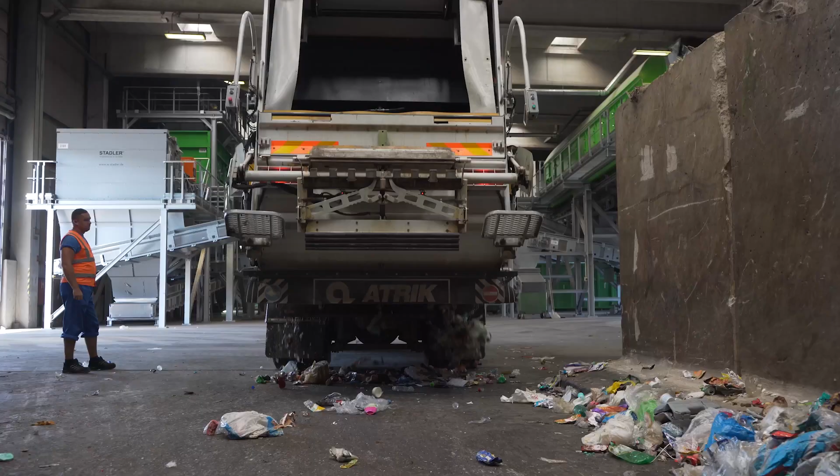In Slovenia, we have a well-developed infrastructure for collecting municipal waste. Waste treatment centers are home to many different processes, including sorting, recycling, and appropriate treatment of waste before it is used for energy recovery.

Celje District Heating Plant is the first facility of its kind for efficient waste processing in Slovenia. It is located in the northeastern part of the city of Celje, in the industrial zone. It is built in accordance with the highest environmental standards, which enables safe operation.

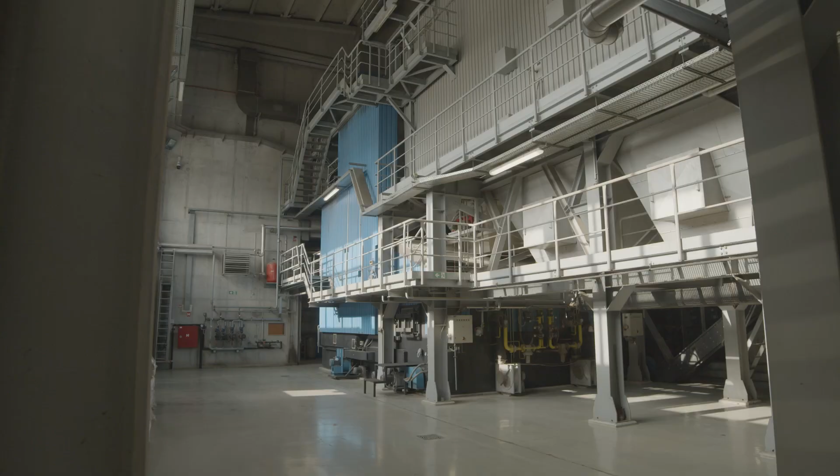The project received support from the city municipality of Celje, the EU Cohesion Fund and the Republic of Slovenia. The district heating plant is managed by the public company Energetika Celje. Celje District Heating Plant is an IED device, which means that it meets high environmental standards and operates in accordance with European Union guidelines for industrial emissions.

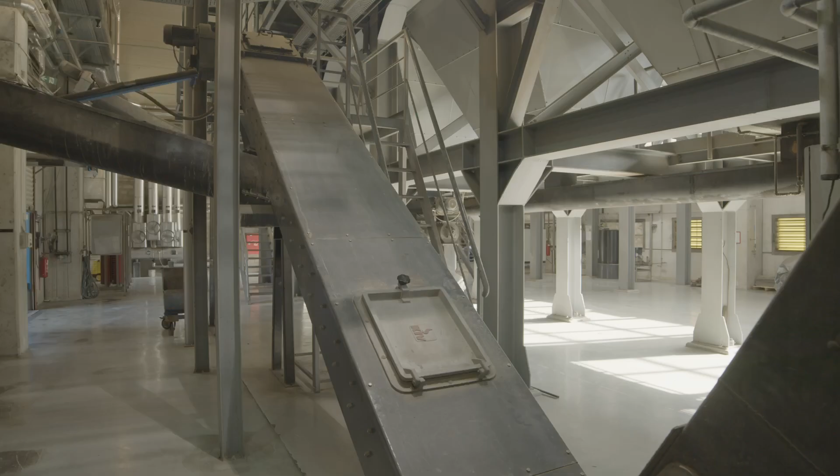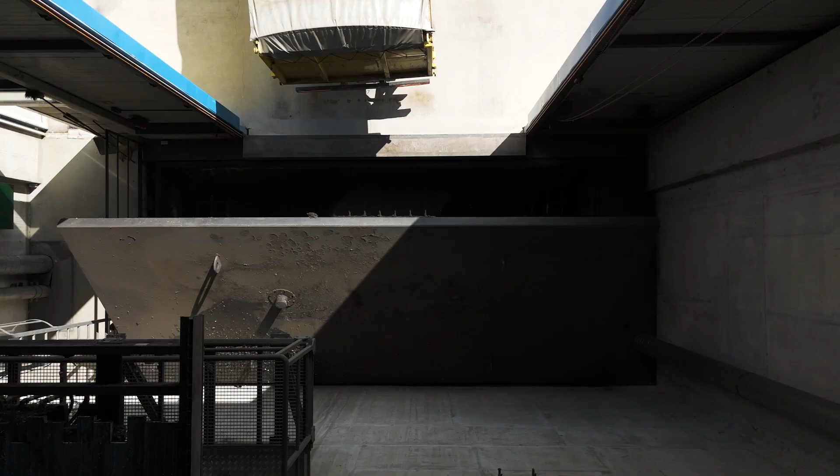With its operation, it follows all legally prescribed requirements and persistently pursues the goals of the latest available technologies. The Celje District Heating Plant is equipped with modern infrastructure for thermal processing of municipal waste and sludge from wastewater treatment plants.

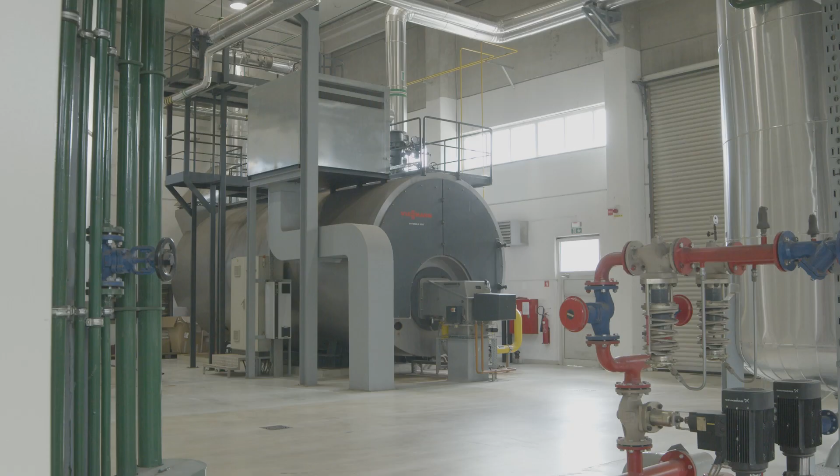Pre-treated mixed municipal waste, referred to as the light fraction, along with dehydrated sludge, is delivered to a storage tank. From there, the waste goes to the incinerator. High temperatures are generated and these waste materials are then utilized for energy purposes. Pre-treated waste, in the form of light fractions and dehydrated sludge from the wastewater treatment plant, is delivered by vehicles to dedicated storage tanks. Each of the two wastes has its own storage tank.

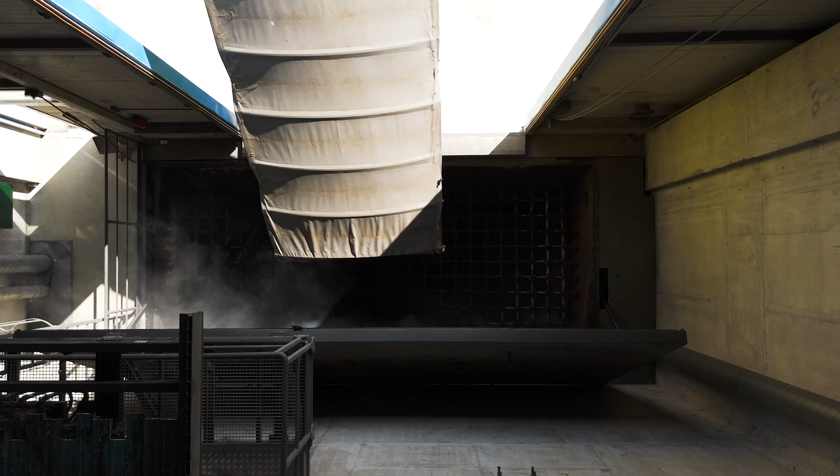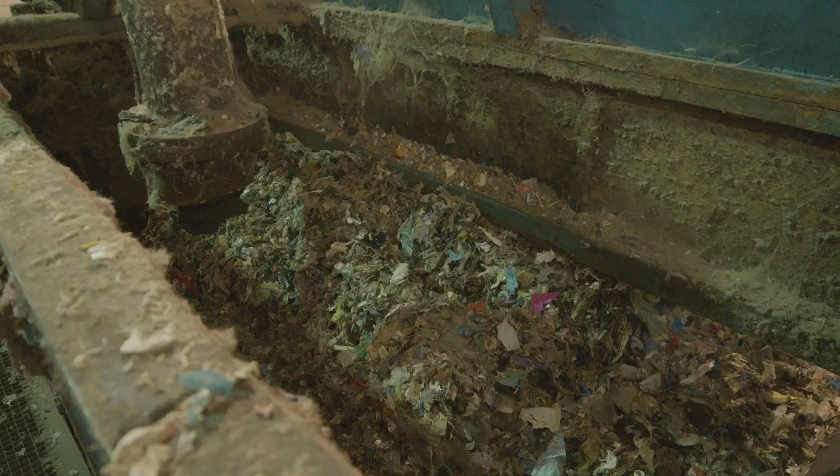The next step is to transfer them from the storage to further processing. This is followed by the dosing of the light fraction and sludge in the appropriate ratio to prepare the optimal fuel for thermal treatment. The solid fuel prepared in this way is continuously fed into the combustion chamber of the device in a closed transport system.

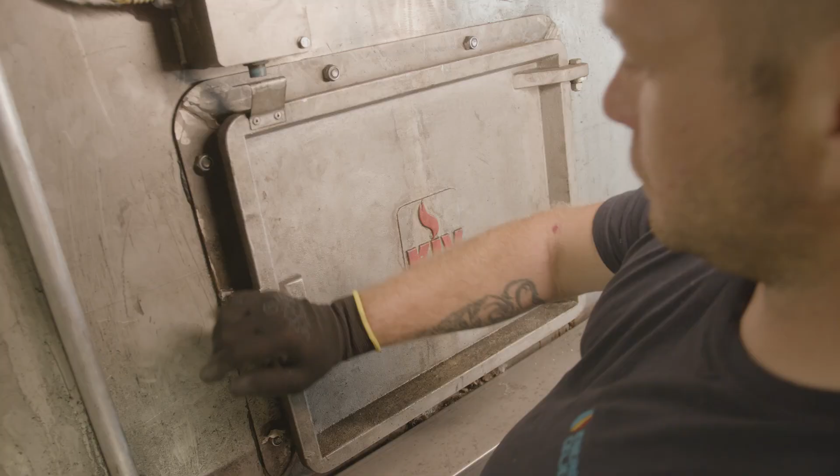On the grate, the solid fuel is first heated and dried, followed by gasification of the solid fuel on the grate. The resulting flue gases from the solid fuel gasification process are mixed with additional air. This is followed by combustion of the flue gases in the combustion chamber at a suitably high temperature above 850 degrees Celsius and a minimum residence time of 2 seconds.

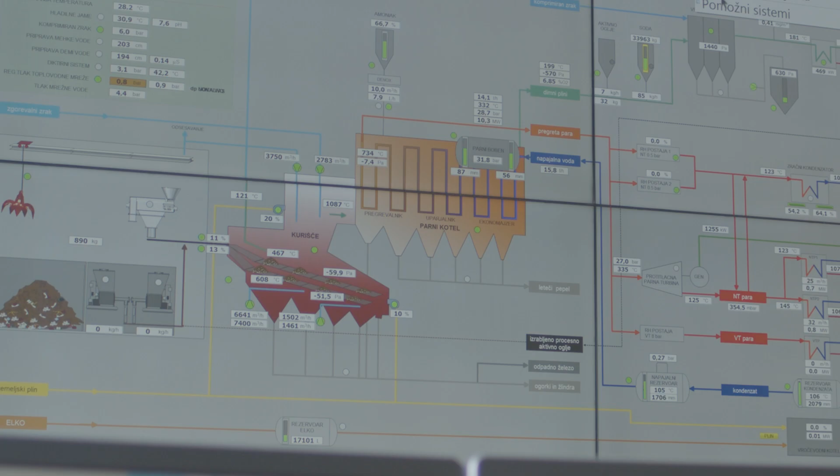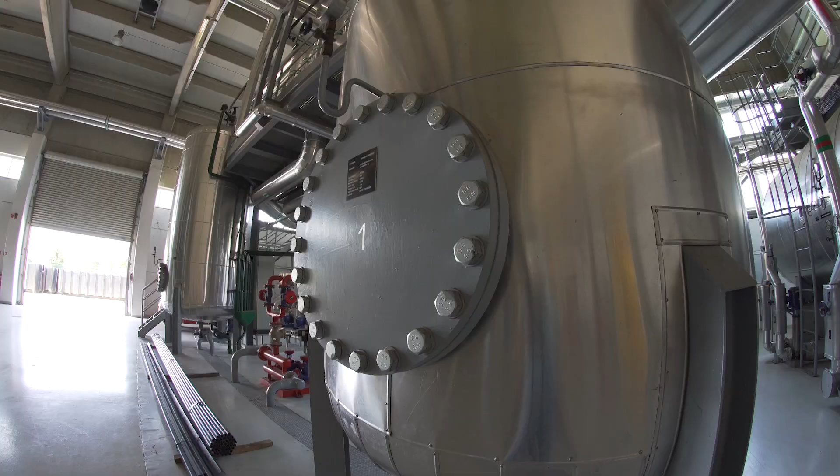The temperature in the combustion chamber is continuously measured and is included in the control loop of the process, which allows maintaining optimal combustion conditions. The generated waste flue gases are led through a steam boiler, where they give off their thermal energy. The waste flue gases are cooled down, and the released heat energy is used to produce superheated steam, which is used to produce electricity and heat for district heating.

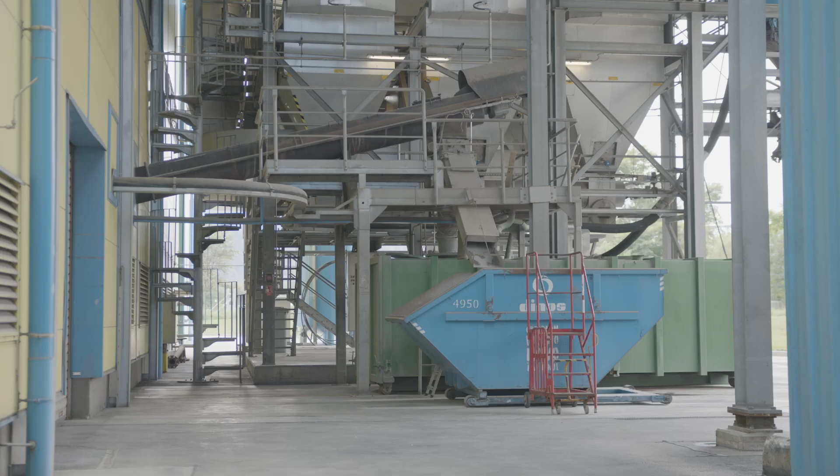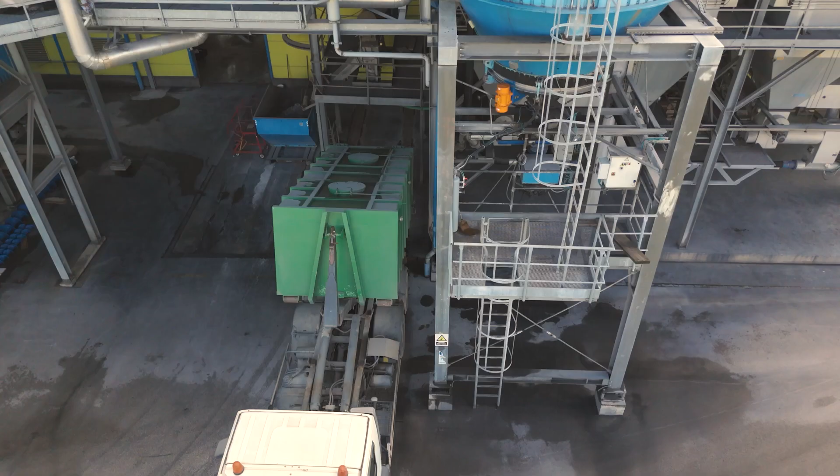During the process of thermal treatment of solid fuel, cinders and slag are produced, which are led to a dedicated container along a closed transport route and then disposed of as non-hazardous waste at a landfill. During the de-ashing process, ferromagnetic metals are also removed, which are given to the recipient of secondary raw materials.

The thermal energy obtained from the incineration of waste is used for the production of electricity on a steam turbine with a generator and for the production of heat for the needs of the district heating of the city of Celje. Combustible waste has a high calorific value and therefore represents a valuable local source of energy. By using the energy present in this waste, we can reduce our energy import dependence and consumption of fossil fuels, and at the same time reduce the amount of waste that ends up in landfills.

The technical capacity of the device is up to 40,000 tons of waste per year, which is also the amount of thermal treatment of waste according to the Environmental Protection Permit. The actual production, of course, depends on the amount and calorific value of thermally treated waste.

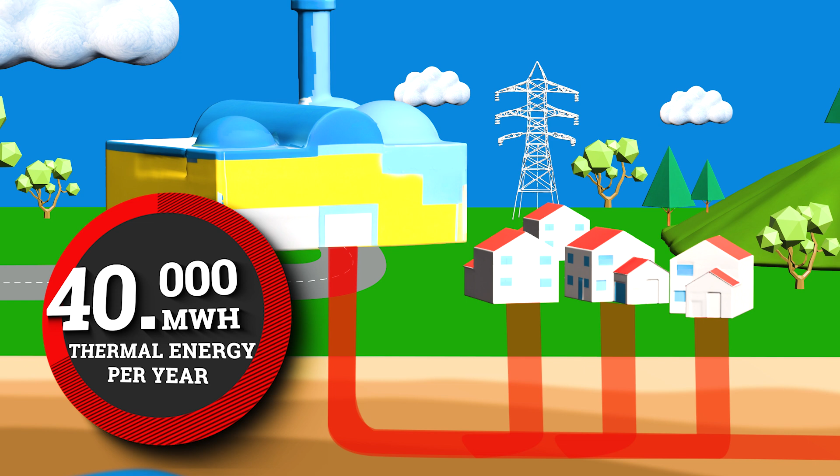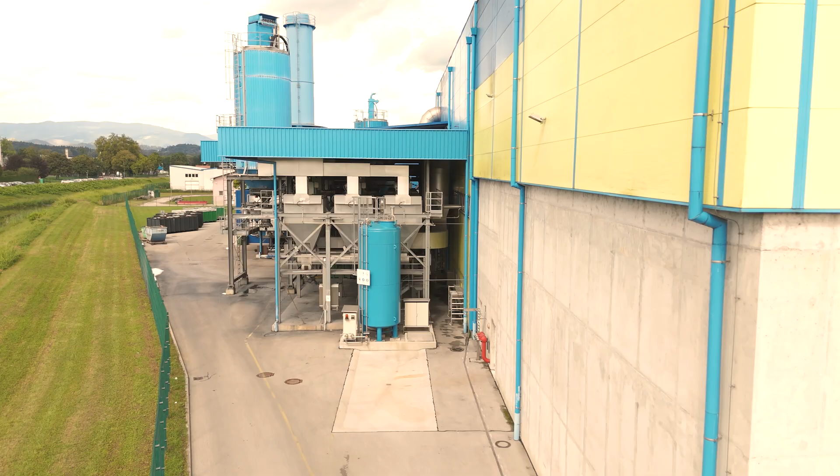Thus, on average, more than 40,000 megawatt-hours of heat energy and over 8,000 megawatt-hours of electricity are supplied per year. Next comes a critical step: the cleaning of flue gases. The facility utilizes advanced technologies for monitoring and reducing dust emissions in flue gases.

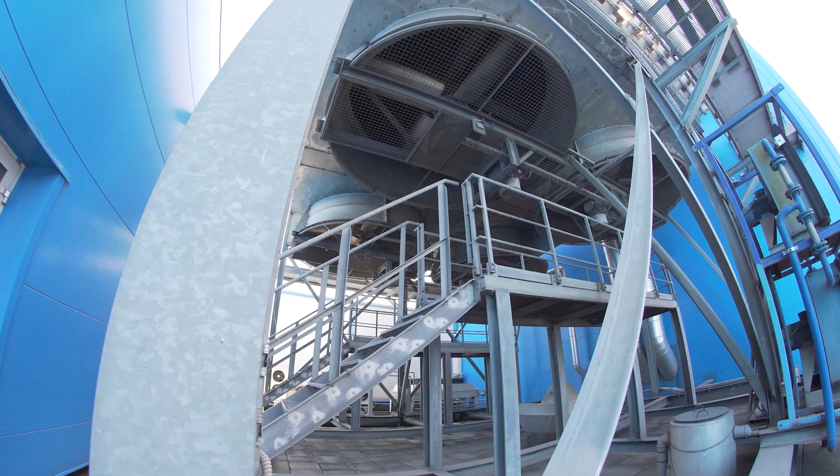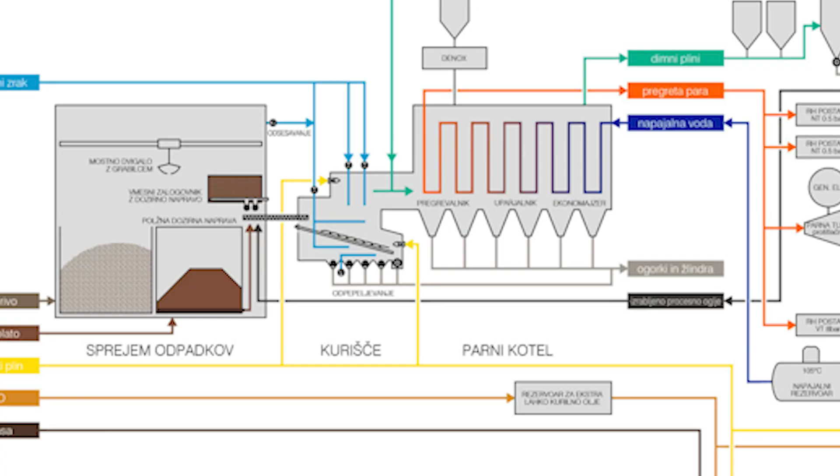The process of cleaning flue gases includes flue gas recirculation, the injection of ammonia water, sodium bicarbonate, and powdered activated carbon, as well as the use of bag filters and coke filters. Reducing emissions of acid gases, organic substances and heavy metals, and reducing dust emissions by blowing a mixture of sodium bicarbonate and powdered activated carbon into the flue gas stream before the bag filter, where the main chemical and physical

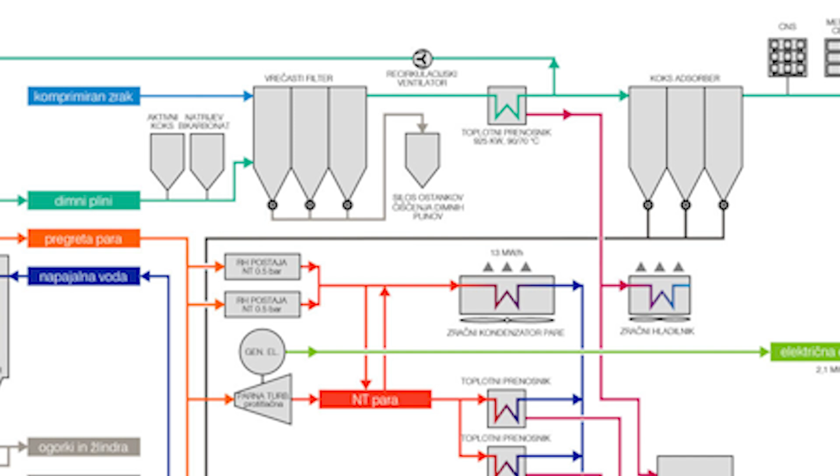cleaning processes take place. This creates solid cleaning residues, which are collected in a hazardous waste silo and handed over to an authorized receiver for permanent disposal abroad.

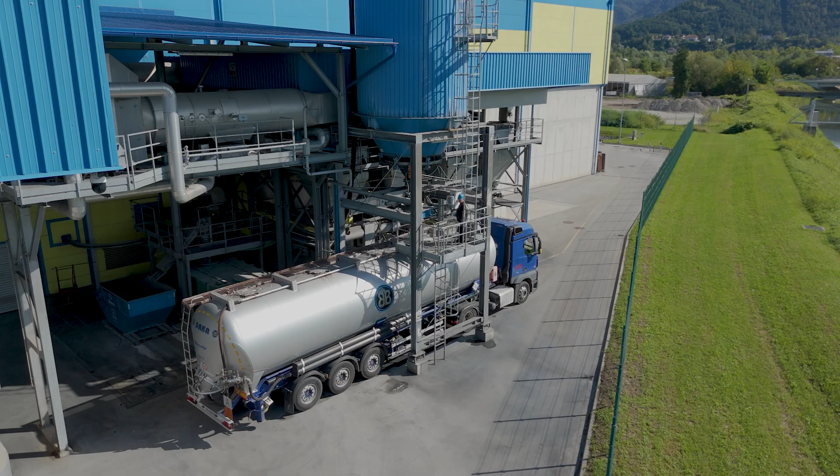Additional flue gas cleaning on the coke filter to polish emissions of organic compounds, dioxins and furans, heavy metals and acid gas emissions. With a multi-stage waste flue gas cleaning system, we effectively reduce the emissions of harmful substances from the thermal waste treatment process and thus contribute to a cleaner environment.

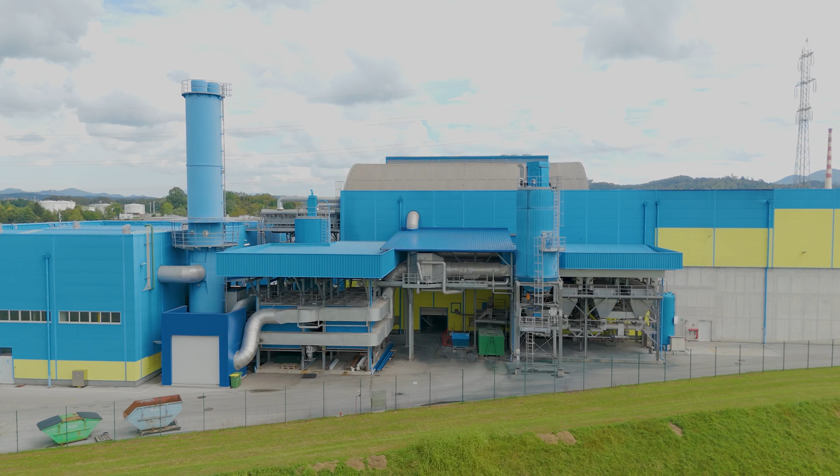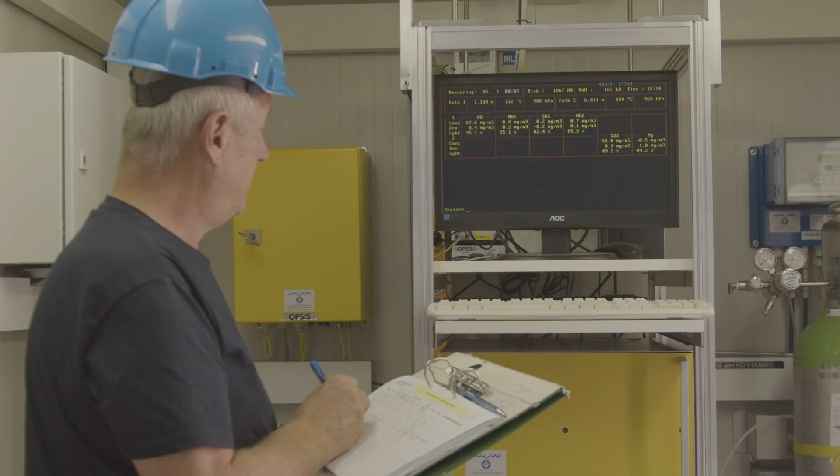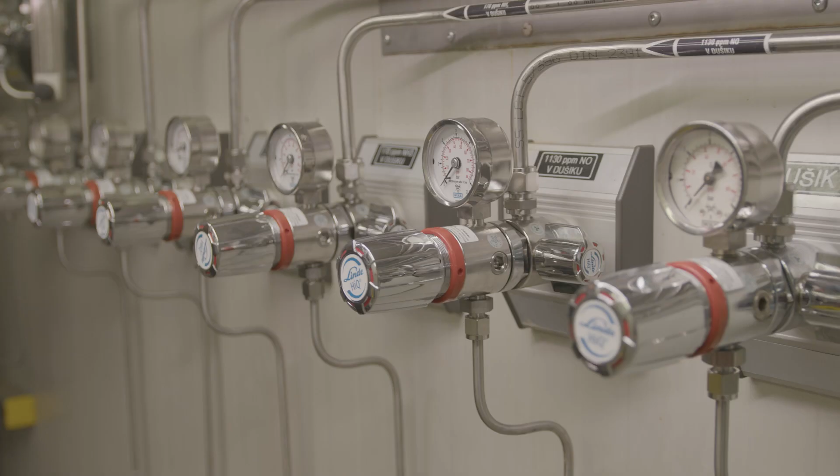In accordance with the valid environmental permit, the prescribed emission parameters are measured permanently and during periodic measurements. The measured values, together with the measured technological parameters, are the input control parameters for managing the entire process and contribute to optimal operation. We ensure the stability and safety of the device through regular maintenance, stable operation, and investments in process updates and optimization, as well as through employee education and training.

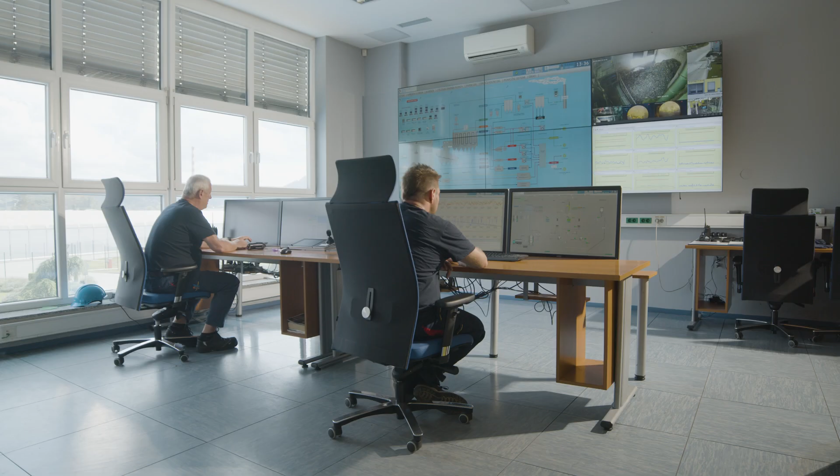Control and management of the entire heat treatment process is carried out from the control room 24 hours a day, 7 days a week. With permanent measurements, we ensure constant control of the operating and emission parameters of the waste incineration process and the quality of waste gas cleaning. All data is connected to the central control system.

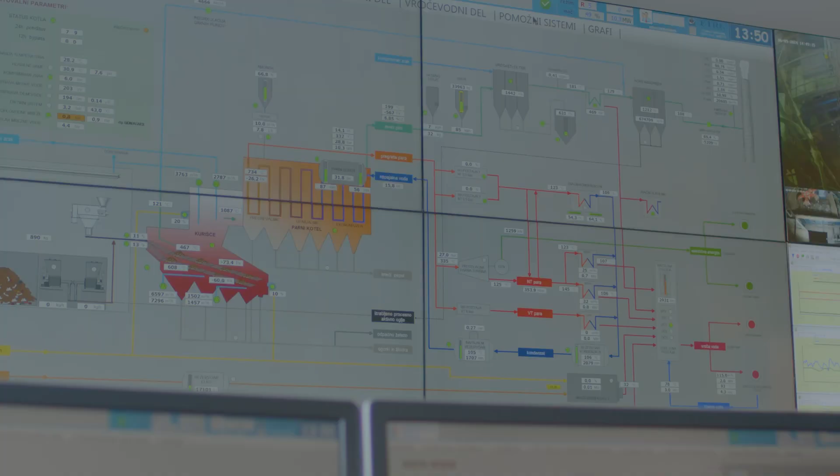Visualization of the process by displaying the entire device and operating parameters on the monitor enables simple and transparent monitoring of the process. The monitored parameters are included in the control loop for managing the technological process and dosing the necessary additives. The operation of the device is automatic, which reduces the human factor in system management to a minimum.

Celje District Heating Plant achieved exceptional results in its operation. With our innovative approaches, we have extended the life of the landfill, increased the production of heat and electricity, and reduced greenhouse gas emissions. Toplarna Celje supplies several thousand households and business users in Celje with thermal energy via a district heating system. The electricity we obtain in the heating plant is distributed to the electricity grid.

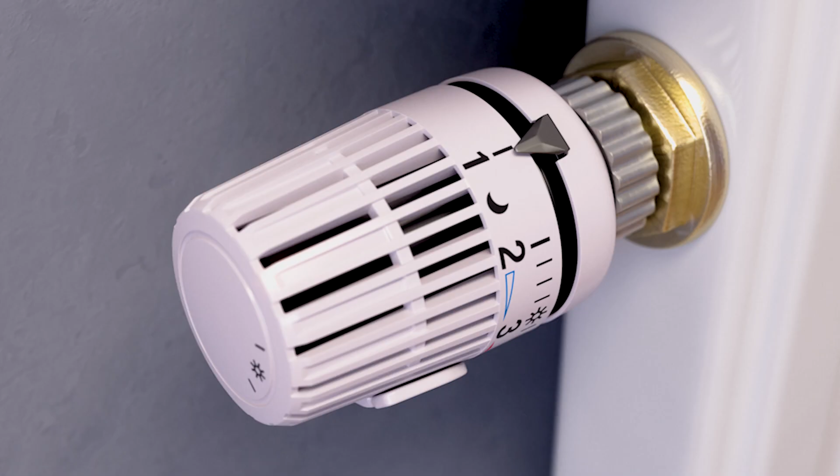Did you know that from 10 kilograms of waste, we get so much energy that you can heat your home for 8 hours, charge your laptop for 2 months for 3 hours a day, or take a hot shower for 5 minutes for 7 days?

Celje District Heating Plant is a stable, reliable and affordable source of heat for the residents of Celje. Heating prices per megawatt hour in Celje are among the lowest in Slovenia. Low prices are the result of the use of waste and sludge as fuel, which makes it possible to reduce dependence on fossil fuels and, consequently, to reduce dependence on market price fluctuations.

Due to the use of alternative fuels, the reduction of dependence on fossil fuels and the reduction of greenhouse gas emissions, Toplarna Celje has a positive contribution to the protection of the environment. At Celje District Heating Plant, we take care of efficiency, safety, human health and the environment. Emissions into the atmosphere are measured permanently.

Data on emissions are publicly available via the website of Energetika Celje and via the display on the external facade of the heating plant, which ensures transparency and accessibility of information and confirms our commitment to the safety of human health and the environment. Celje District Heating Plant is a key point of the sustainable energy system of the city of Celje. By providing reliable energy and protecting the environment, we contribute to a better future for all of us.